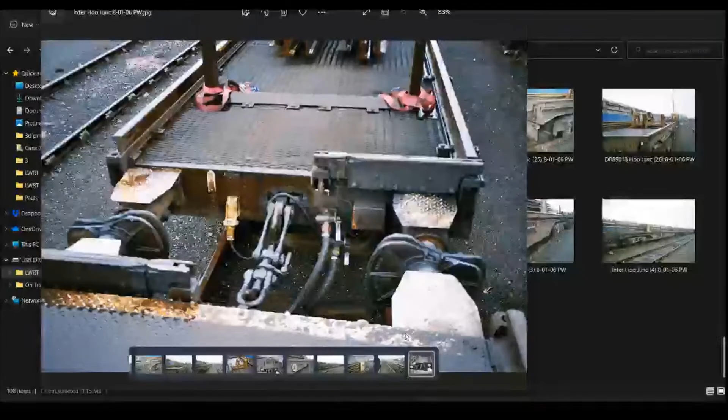But the rail itself is just a normal piece of rail. I do have dimensions that Paul's provided in some of his drawings, so we're going to draw based off of those and maybe scale up slightly, because the dimensions of the track itself are quite tiny and make it quite difficult to print.

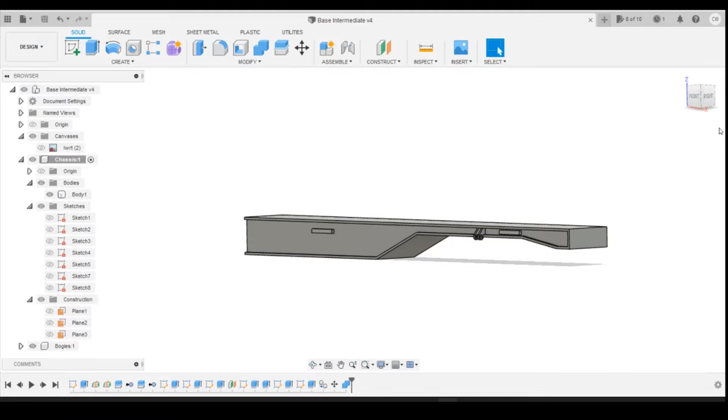So the dimensions that Paul's given me is it's 3 inches across the top of the rail and 6 1/4 inches high. And obviously the base is a little bit longer than that, 3 inches across - the base is probably closer to 5 to 6 inches. So we're just going to try and do some sort of representation of this, and then we'll see how it looks once we've drawn it.

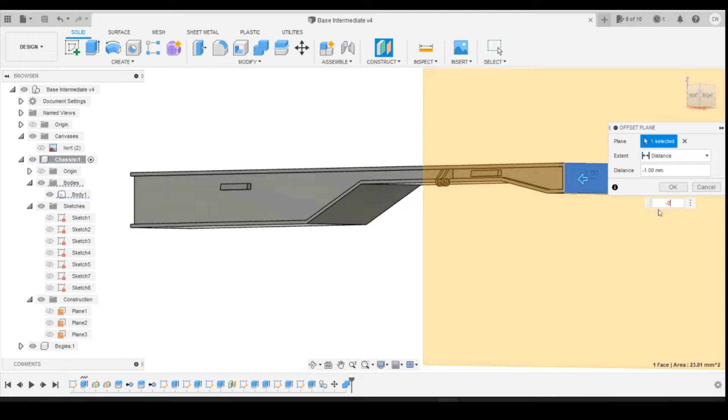So jumping into Fusion, we're going to create a sketch. In fact, we're going to go slightly off of this - we're going to create an offset plane from the headstock, and I'm just going to bring that into the wagon ever so slightly. If you look at the photo here, it's not all the way in, but it's not flush, it's just ever so slightly off of it. So I'm just going to bring it in by minus 0.5 millimeters, just half a millimeter away from the edge.

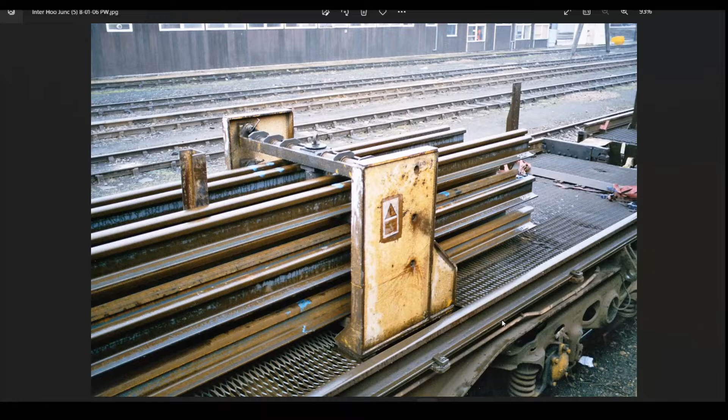We're going to create a sketch on that new plane, and we're going to project on that front surface of the buffer beam so that we've got something to connect to.

The other thing to note is the rail itself is up flush against the side of the frame here. It is raised ever so slightly. What I'm going to draw is just connected into the bottom - I'm not going to raise it at all.

So I'm just going to start by creating another 2-point rectangle just to start, and we're going to do just a simple rectangle like that.

So the height of the rail is 6 1/4 inches, so let's call it 159 millimeters. We can define the height there as 159 divided by 148, which is again the British N scale.

And then the width is 3 inches across the top. I'm actually going to do it as 5.5 inches, which will be the base, and 3 inches across that top section. So let's call that 140 millimeters. Define that as 140 divided by 148 - it'll be just under a millimeter like that.

So we've got the basic rectangle shape. Now we're going to draw on the actual rail head itself.

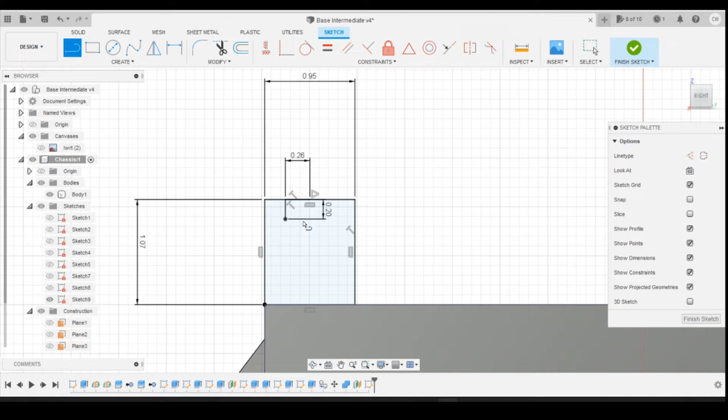So the top of the rail head is 3 inches wide, which is 76.2. If we half that, then we do 38 millimeters - that's our center point to the outer point. So we draw a line. We're going to find that center point, and you see it snaps with a little triangle there. So you can just draw a line, and we say it was 38 millimeters divided by 148, and that will create a point on there.

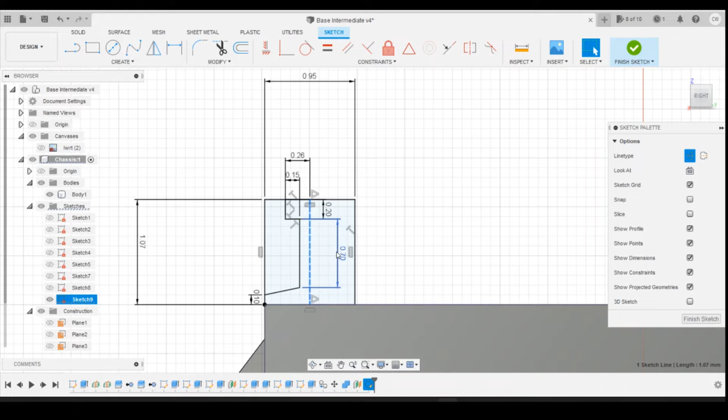That's 0.26 millimeters. We then draw a line down - I'm going to come down 0.2 millimeters, and then I'm going to come back in, let's go 0.15, and then we're going to come back down, let's go 0.7 millimeters, and then we're going to draw a diagonal angle down, and we're going to find the height from the base to the top of that angle as 0.1 millimeters.

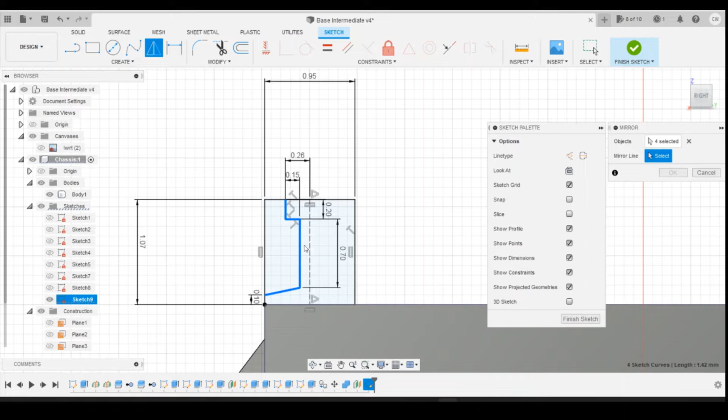So now we've got this shape here, which is our sort of railhead type shape. I'm going to draw a line down that midpoint. I'm going to select that line, and I'm going to change that to a construction line so that it's not within the sketch, but it's there for drawing purposes.

Next thing we can do is mirror these lines across. So select mirror, select those lines, and then select the mirror line as that center line here. Let's try it again - that line, and then the mirror line being that construction line.

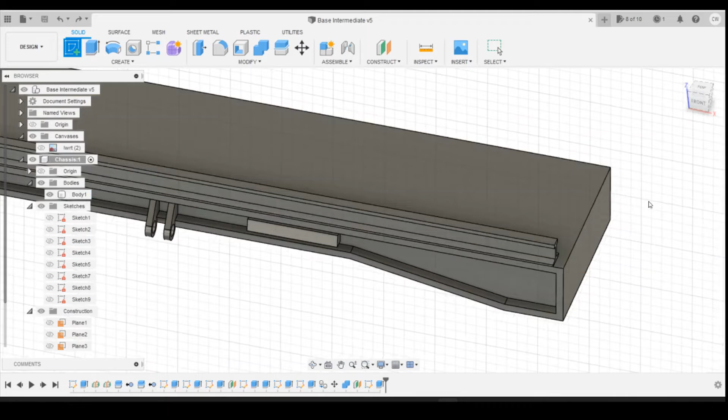So now we've got that basic rail shape. Now you could curve the edges off, but they're not going to be seen, so I don't really think there's much point. If you're going into 4mm or 7mm, maybe you'd want to, but I'm not going to waste my time doing that.

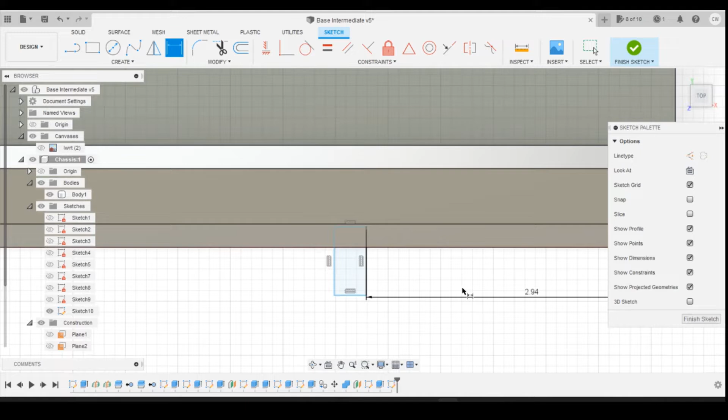So select the profile now, and I'm going to extrude that profile. I'm going to drag it all the way to the inside of the wagon there, and tell that to join. Click on OK, and now I've got that rail. Nice and simple drawing there.

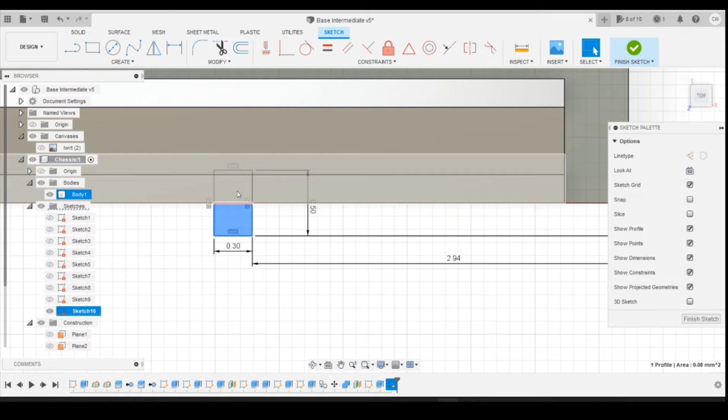Okay, so now we've got these rails drawn. The next thing we're going to do is the little clamping blocks. So I've got the diagram that says from the end of the rail to this first one is 435mm, and then between the centre point of each of them is 1550mm. We can work that out and pattern those along the wagon to make it nice and simple.

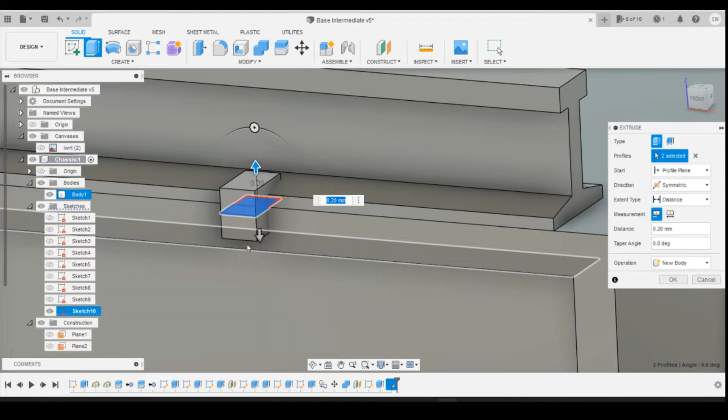All I'm going to do is some little rectangles that will protrude and look like they're in the right place. So jumping into Fusion, we're going to create a sketch on the top surface, use a 2-point rectangle, draw one out initially, and find the distance from the buffer beam to the edge of the part - 435mm divided by 148.

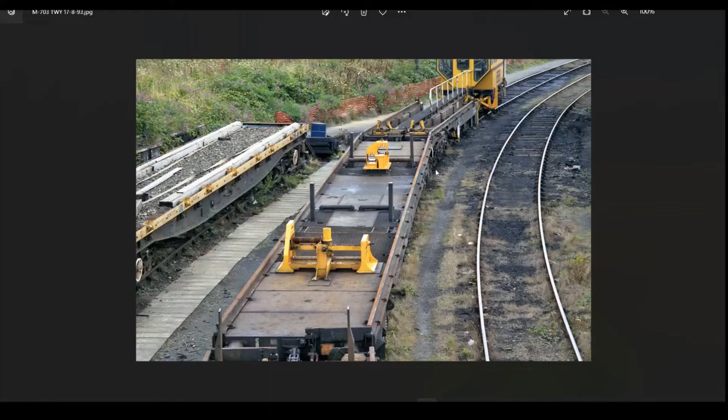Catch up, there we go. Then we're going to define the width as 0.3 and the height of the part I'm going to go 0.5. I'm then going to define the height from the point here to the point of the box we've just drawn - 0.25.

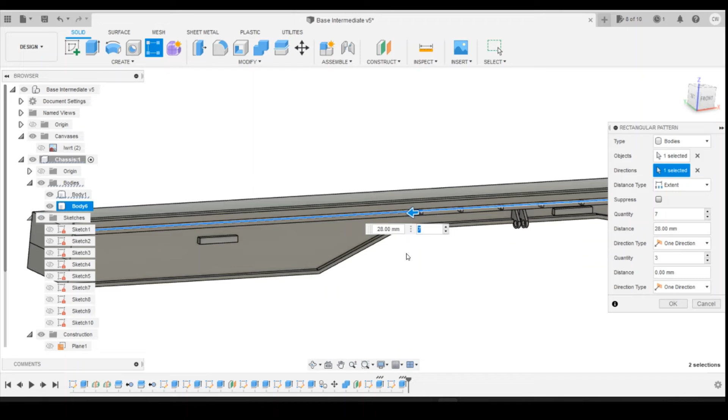Then select those two profiles, holding Shift and then holding the left mouse button down to get the drop down. Extrude, new body, symmetrically. It's come up with an error - let's change that to new body.

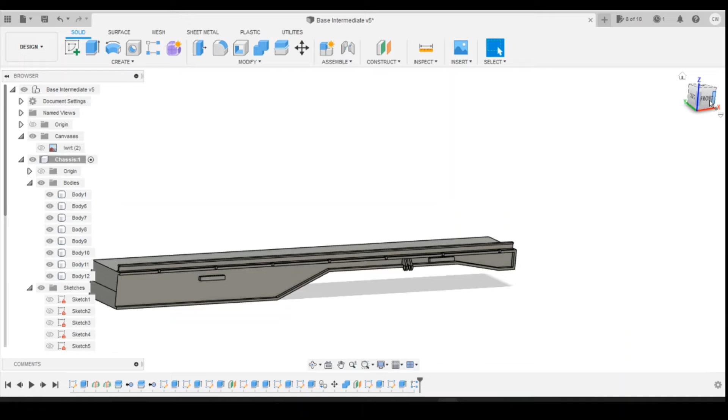I don't know why it's coming up with that error, but just changing that to new body, which is what I wanted anyhow, got rid of the error. So we've gone from 0.2 - do I need it that far down? That's what I'm thinking. Yeah, I'm going to go with that. So symmetrically extruding 0.2mm, create a new body.

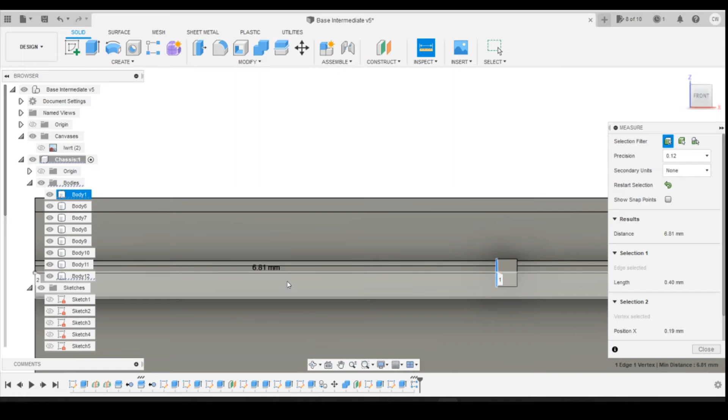Okay, so looking at the wagon, each wagon's got 1, 2, 3, 4, 5, 6, 7, 8, 9, 10, 11, 12, 13, 14 of these clamps, so 7 on each half.

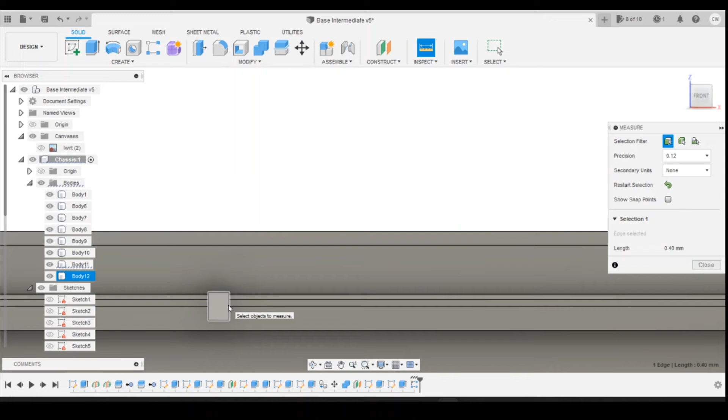So we're going to do a rectangular pattern, select that body. Direction, we're going to do horizontally along the wagon. We need 7 of them - 1, 2, 3, 4, 5, 6, 7. Yep, and we'll drag these out.

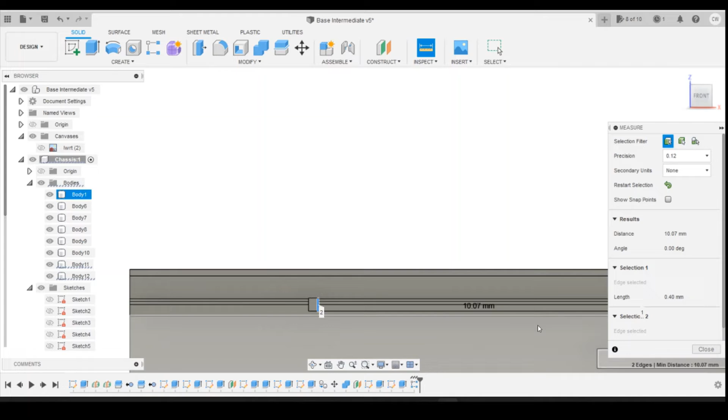Initially drag them 61mm. What I'm going to do is just measure the distance between them, and then the distance from the middle one to the end. We can do that by using the inspect tool. So if we inspect from that point to that point, we've got 9.87mm.

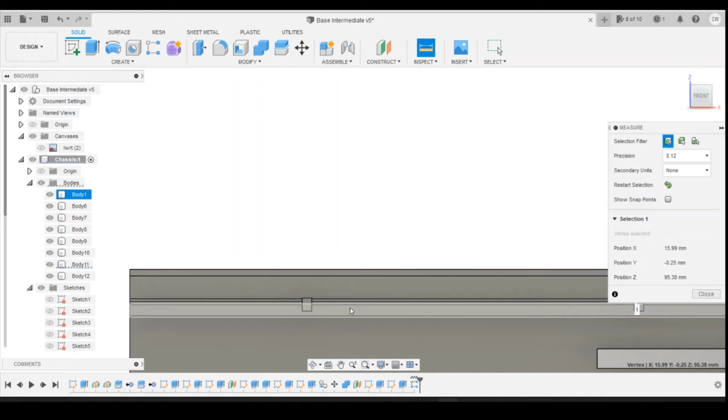We need half of that on this edge here. So inspect from that base to the edge, 6.81. So it all needs to move to the left by probably about 1.5mm. There's probably some maths that you can work this out quite easily with, but maths isn't my strong point.

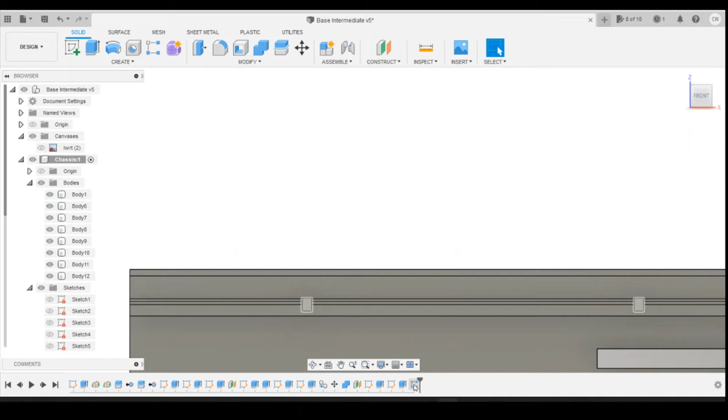So let's try 62mm there, and we can inspect these again - that point to that point. Again, inspect from there to there, so 10mm now. That should leave us, if we're in the right place, 5mm there - 5.81. So probably needs to come to the left by 0.1 of a mil or something.

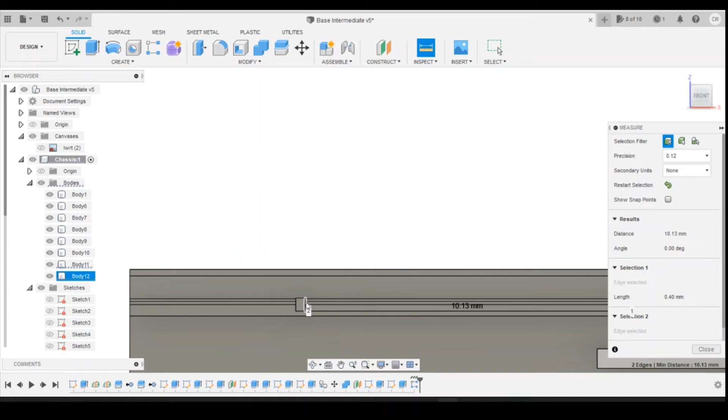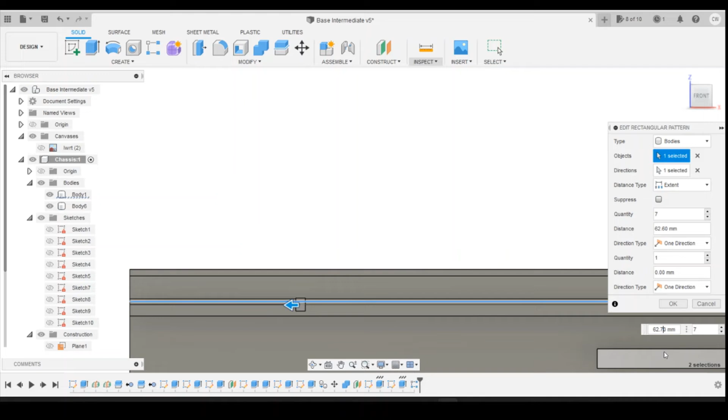Let's go by 0.2. Inspect there to there, so it's 10.07 now. There to there, 5.81, a little bit more. Let's do 10.4 - let me just show you that. So we've done 62.4 there.

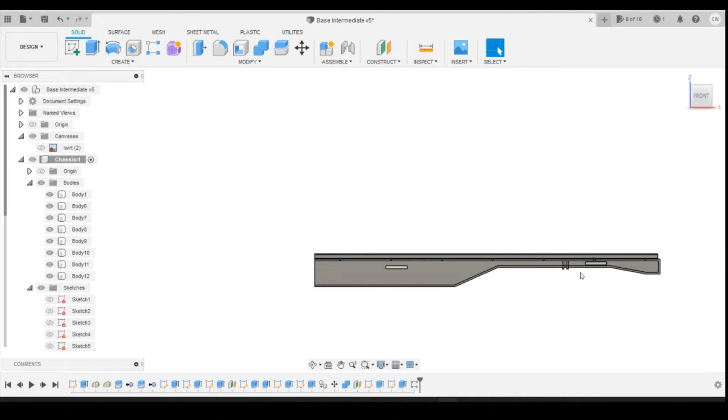Inspect that - there, 10.1. There, flat edge there to there, 5.4, 0.82 wide. Again, I'll just edit this pattern a little bit more. So I'm now going 62.6.

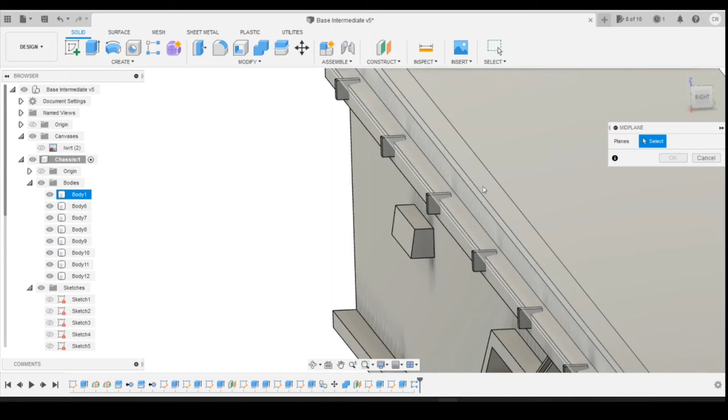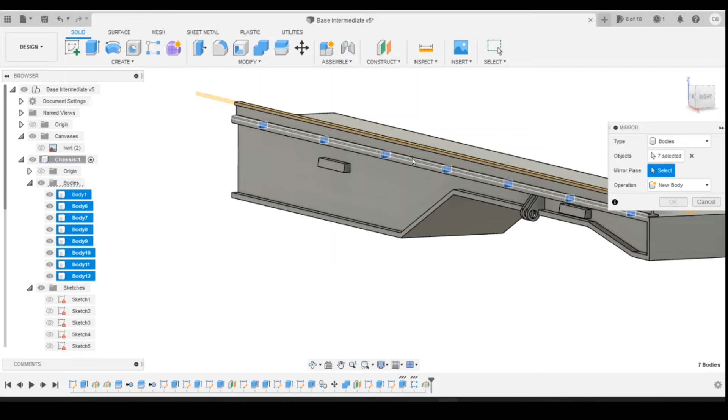So 62.6. That edge to that edge is 10.13. And from that edge to there, 5.2. So we're almost there, we've got a total of 10.4 on that one. I'm just going to shuffle it along just a little bit more.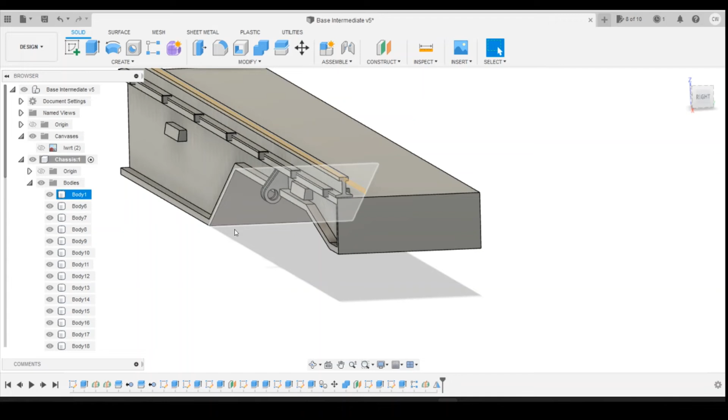So you can see how it's sort of like trial and error to get this right. That's 10.15, 5.11. You know what, that's close enough. We're down to 0.1 of a millimetre, so I'm going to leave it at that point there, knowing that that's going to leave that space in the middle about the right sort of size we're looking for.

Okay, so we've got those going all down there. We need them to be the other side of the rail now. So to do that, what we're going to do is create a mid-plane.

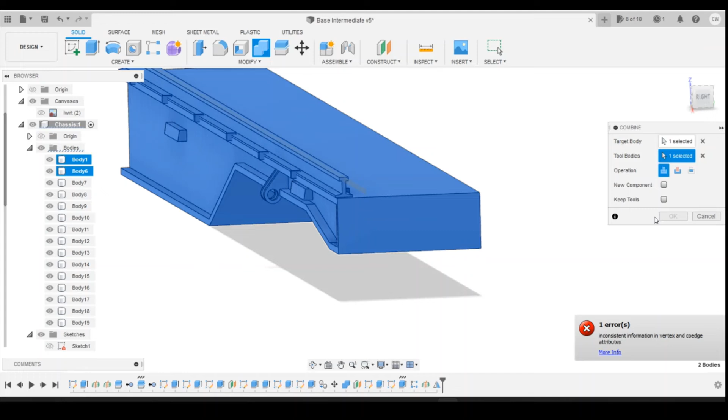It's going to go from... around. I'm going to create a mid-plane from that face on the top of the rail to that face on top of the rail. We know that mid-plane is now going to be down the rail there.

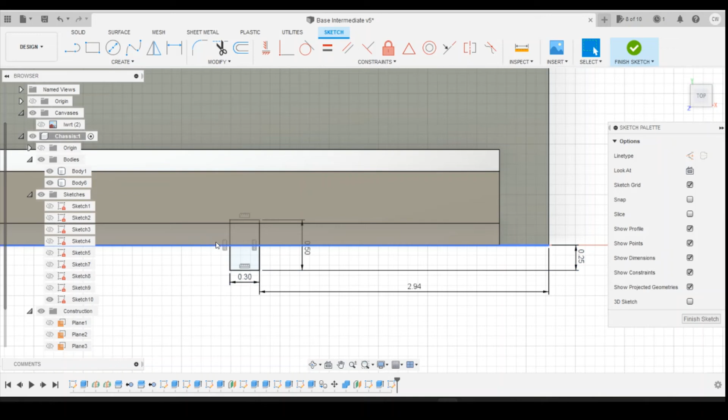And then if we do mirror bodies and select those bodies for each of those we've just drawn, the mirror plane we use is that mid plane we just created, and then we can tell them to join. Should create that on that side.

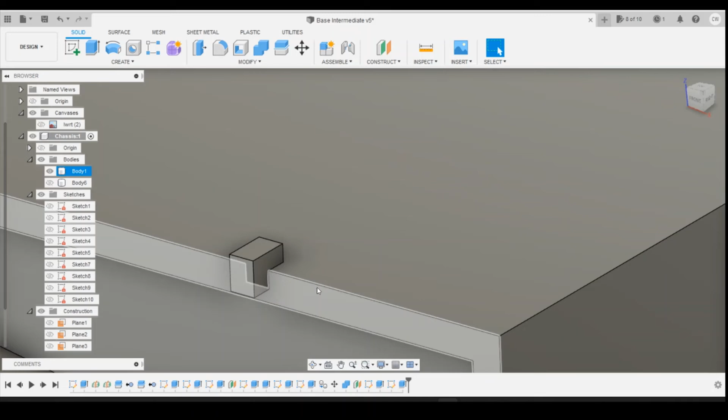Throw an error there, so what we'll do is edit that feature, tell it to be new bodies, see if that then creates it fine - it does.

And then we can do combine, body 1, and then select all of those bodies we've just created. Why won't it work? Should just be able to combine those. Let's try again. So body 1 won't combine.

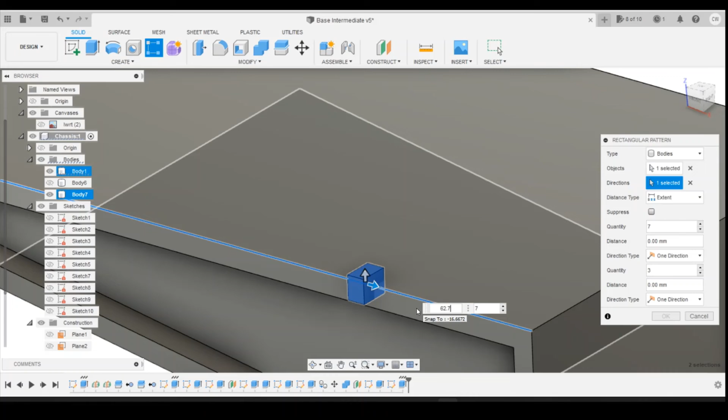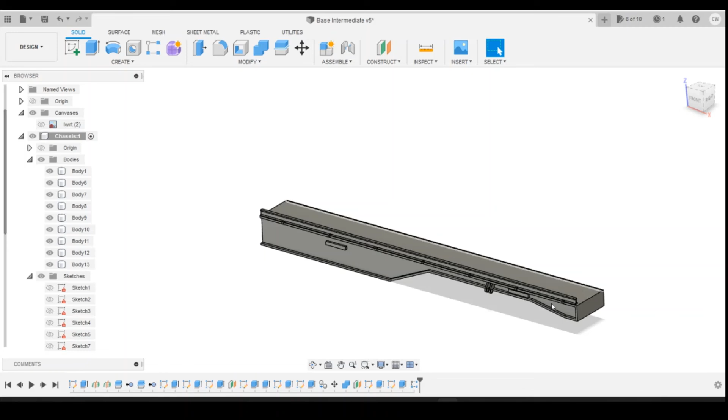Okay, let me try and work out why this isn't working. I'm not entirely sure what's causing the error, but the workaround I've got is I've edited the rail we've just drawn, created that as a new body, so we know we've got a separate body.

Then we go back into the sketch we've drawn, select that profile, and then if we extrude that, turn off the rail, do symmetrical, and join, and extrude by 0.2 millimeters. That's then drawing that fine.

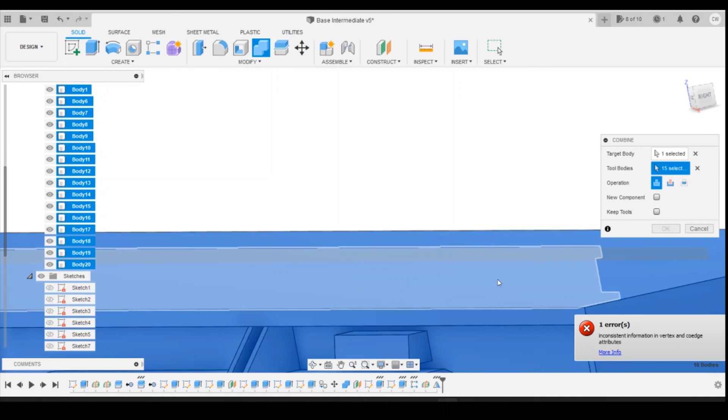We can then do that mirror - sorry, let's undo that. Edit feature, that should be new body. Then we can do that mirror, select that body, direction.

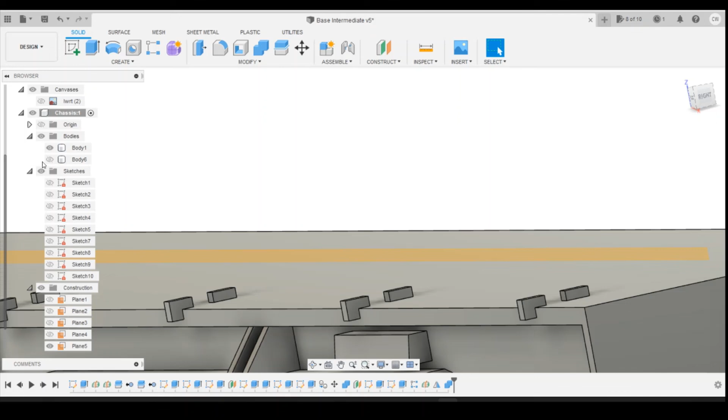Wanted 7 of them, and the mirror was on 62.7 millimeters. Let's go the correct way, so minus 62.7 millimeters. That then draws all those in.

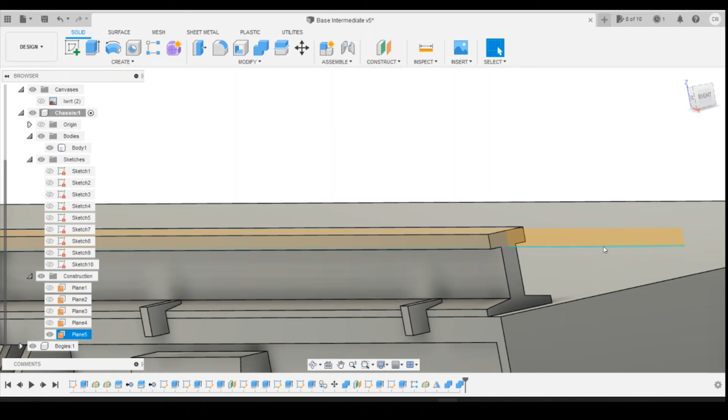And then we can put that mid plane in, mid plane between that face, and...

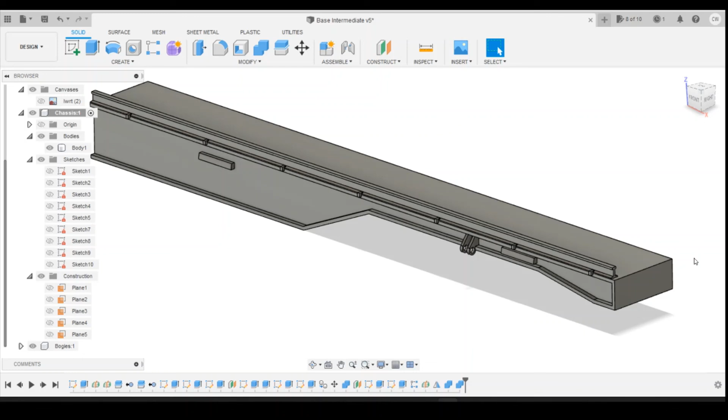Okay, so again, another fudge. I don't know why this isn't working properly. So if we combine body 1 with 7 through to 20, they combine absolutely fine. So the issue must lie around the rail, or something we've done with the rail. If we then do combine body 1 with body 6, which is the rail, it then combines fine. It all becomes one part.

I'm not entirely sure what's going on there, don't know why it's not working properly, but if you work around in that way, for some reason it's managed to work absolutely fine. I'm not entirely sure what happened with that, and it's a bit harder than it actually probably needed to be. I'm sure it's something to do with how the rail was sketched, but you can see how I've just worked around that, found a way to make it work. If I had to, I'd have gone back and completely redrawn that rail.

But yeah, we've got it sorted in the end, so we've got the 7 little locking lugs and the rail drawn on there, which starts to take shape quite nicely.